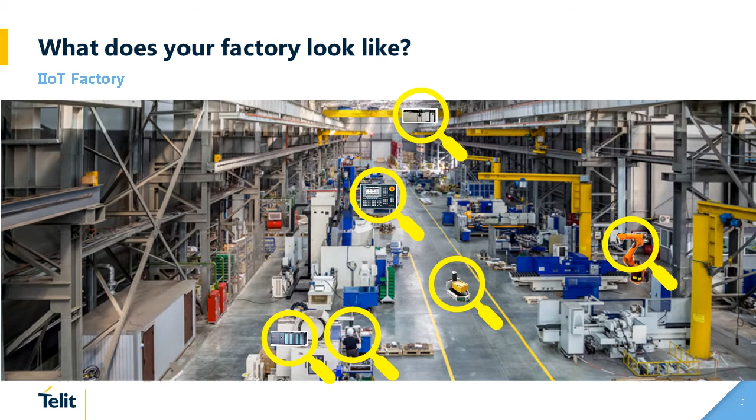What makes this factory an IoT factory are not the controllers that they have, maybe in that smart crane over there, or in this machine over here. Maybe that CNC from Siemens over there, the AGVs moving parts around, the robot on the right-hand side, or even sensors to control the productivity of the people. It also doesn't transform this factory into an IoT factory having SAP ERP systems or Oracle databases or visualizations and SCADA systems, as well as AI platforms in the cloud.

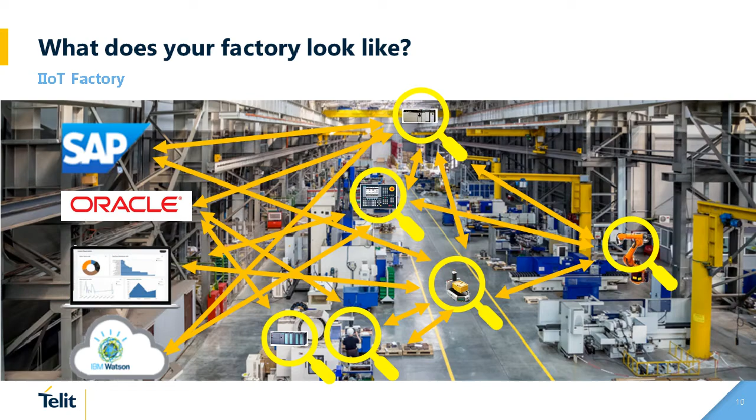What makes this a complete IoT factory is the ability of interconnecting all the different devices, all the different machines with all the IT systems with an intelligent layer of connection. And basically, this is what we do here in Telit. This is what DeviceWise does. Telit won several awards in the market, and it's recognized as a leader in smart manufacturing platforms.

I like a lot the way that ABI Research described DeviceWise, saying that compared to Kepware, DeviceWise has more advantage in lower latencies. Compared to Foghorn Systems, DeviceWise has more advanced IIoT integration capabilities. Compared to homegrown data extraction and edge intelligence solutions provided by industrial automation companies, DeviceWise has more flexibility and more advanced software. But what is DeviceWise at the end of the day?

DeviceWise is a software that can be installed in any type of operating system. You can install it in a Linux computer, in a Windows computer, even in Raspberry Pis or cellular gateways. When you install it, for you to collect data from any machine is simpler than installing a printer at your computer. You just click in devices, you select one of the many drivers that you have.

So here, a few drivers that I downloaded to my computer, you can see Atlas Copco for torque tools, all the different FANUC CNCs and robots, all the different PLCs from Mitsubishi, open protocols such as Modbus, OPC UA, OPC-DA, all the Omron controllers, all the Siemens, all the Rockwells, among many other types of tools that you can connect. We have hundreds of drivers available for you to read and write. You just appoint what is the IP address, and then all the tag tree of the devices gets auto-enumerated on DeviceWise for you to read and write without writing a single line of code.

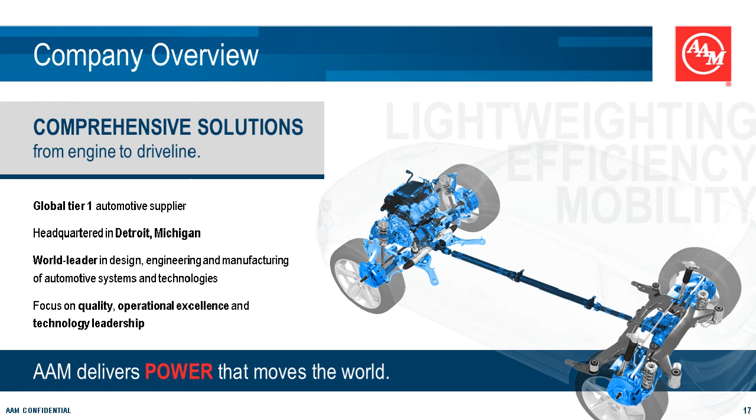Today, we are now spanning 17 countries, I believe, with 80 locations. So the growth has been huge over the past 20 years. We now have over 21,000 associates. At its inception, American Axle's primary customer was General Motors, but today, while General Motors remains one of our good customers, we have over 700 additional customers that we support with our products.

Internally, we're divided up into 2 major divisions. The first is our driveline division, where we make axles, driveline components, prop shafts, independent rear drive assemblies that go in passengers and crossovers. Our axles typically go into light trucks and SUVs. A lot of the vehicles that you see on the road today, those are our axles running in those.

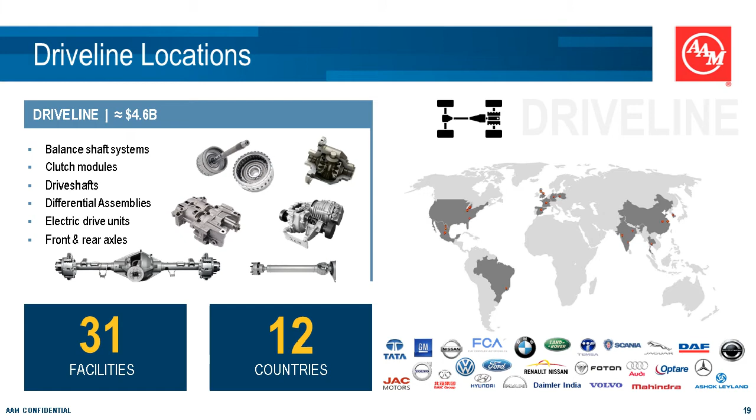We also have a significant push. If you follow the automotive industry at all recently, you'll know that there's a big push into electrification, both hybrid and full electric vehicles. And that's been our push as well. So a lot of our products are moving in that direction. There's just a lot of activity going on. We have a number of major programs where we're supplying either hybrid componentry or full electric drive vehicles. Currently, the driveline division is spanning 31 facilities in 12 different countries across the globe.

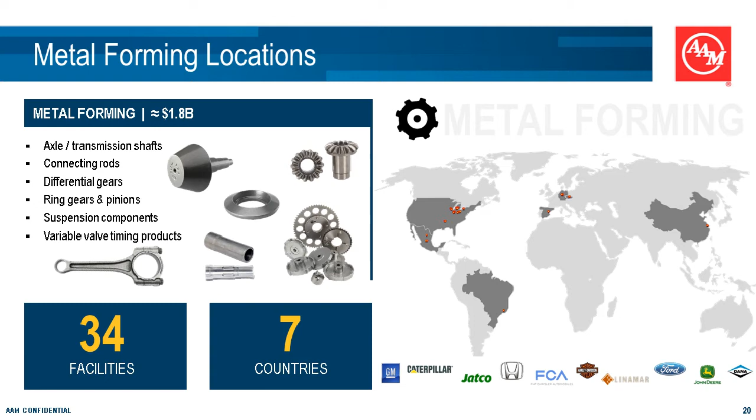Our other division is our metal forming division. Classically, our forging operations fall into that, but it also encompasses a lot of component machining, and that's also spanning 34 facilities in 7 countries. We also have a number of facilities that are either corporate offices, engineering facilities in different regions, and sales offices as well. Myself, I'm headquartered out of our Advanced Technology and Development Center located in Detroit, Michigan. We are right across the street from our world headquarters building on Dauch Drive.

The role I'm currently in is the Manager of Advanced Controls Engineering in that facility. We are responsible for our controls architecture across the globe as we go into new facilities or look at our existing facilities as we deploy new lines. All the controls architecture that we put in place to do our assembly systems and other systems falls under my group to specify and to look at new technologies going forward.

I joined American Axle in 2000, which has now been over 20 years. Prior to that, I was working on a contract basis on several projects at American Axle. And ever since my involvement with American Axle, there's been a huge focus on production build data, machine performance data, getting all that data acquired into a system where it can be visualized, interpreted, and used to make intelligent decisions. If you don't have the data, it's always just an opinion.

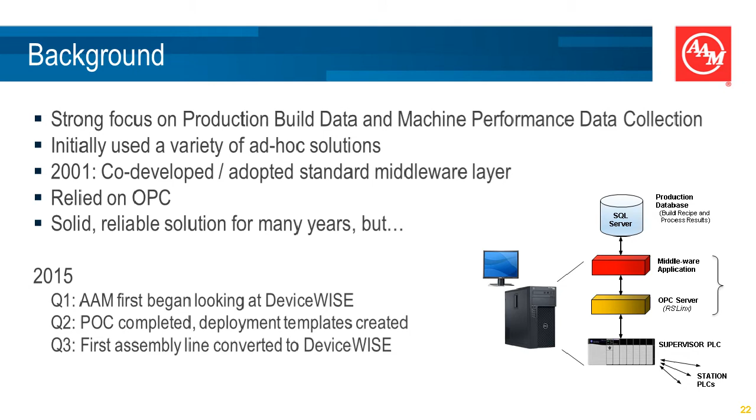When we turned that into a functional system, we did our benchmarking on that, and basically our proof of concept offline, and decided very quickly to move that into a production system to prove its worth to us and decide where we were going to go with it. Some of the features that jumped out to us, and Ricardo touched on a couple of these things, and I'll talk about the ones that were important to us.

Biggest one for us, performance. Our previous application that we used at the middleware layer, because of the generation in which it was written and because it was an OPC-based kind of thing, wound up being a single-threaded application, which normally worked pretty well, but as our demands grew, that became a problem. And DeviceWise, being a multi-threaded application, has a couple of unique benefits, primarily being performance.

The other one is, Ricardo was showing you how to build a simple trigger. Those triggers can all be edited independently. They can be edited online while the production system is running. That became a huge benefit to us. Having that little logic engine in there where we could make decisions down at the edge was a powerful tool for us. We had previously been strictly data collection.

We would identify tags and just simply pull them and suck them up, which was not uncommon. That's what most systems would do at the data collection layer. But being able to make that decision process out at the edge and have handshakes involved where we could be sure that we had that data was important to us.

The Workbench that Ricardo was showing earlier, that is well suited toward remote access. In fact, we always today use it in a remote scenario where the data collection node is down at the assembly line. We always run our configurations from a laptop or a workstation remote from the line, so we don't have to be on that physical PC. That's great from a security posture as well for us.

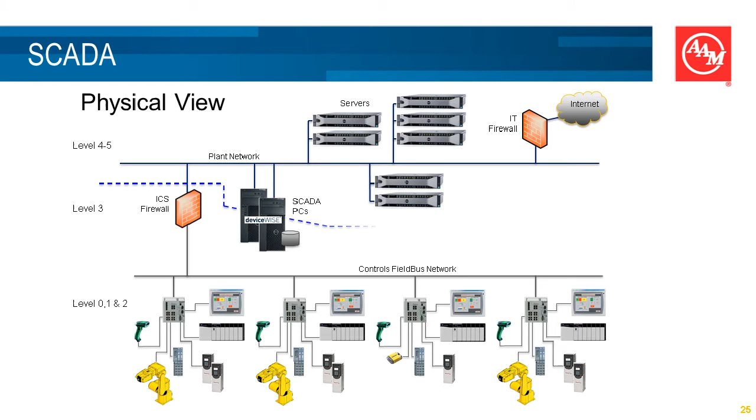Upper level IT systems come down and read that data out of the local database and move it off for other systems for reporting and decision-making solutions that are managed by the IT department. But as far as the data collection side goes, that's kind of where we position it. So we launch one of those systems with every assembly line that we do.

What we did is we took that proof of concept, those initial developments that we did, we put that into a set of templates. We published that in a book and we gave that out to our plants. Now, what Ricardo showed you earlier with how simple it is to put a trigger together was exactly right. It is that simple, but it can be simpler.

One of the things that we found that was a very powerful feature for us is the fact that all of the configuration you can export into an XML format, modify, and import it back in. And that's one of the primary ways that we deploy these systems.

We have a set of templates that we use to deploy to every station on the line, where we take a text XML file, modify it to what we need, import it, and then just go through station by station with those modifications. And in the span of half an hour, I can have the entire line functional with this system.

We go in after we have that first level of functionality, which covers all the handshaking, all the basic transactions, and then we add all the specific stuff for those stations. If we want to collect additional data or we want to retrieve additional limits, we add those in. There's placeholders there for that.

We do all of our interaction with the database with stored procedure calls, and we have in the configuration inside DeviceWise, we build a transport map, is the term that they use for it, where we have all of those parameters identified and templated into our transaction blocks.

So in a typical system, we'll have the project tree that looks something like this. The reason I'm showing you this is we try to keep this as simple as possible, because one of the things I like to do is, in some sense, I like to discourage excessive creativity. While it's a very capable thing, I try to keep my hands on what the standards are and keep people adhering to those standards. That makes things more supportable going forward, which is generally a good strategy.

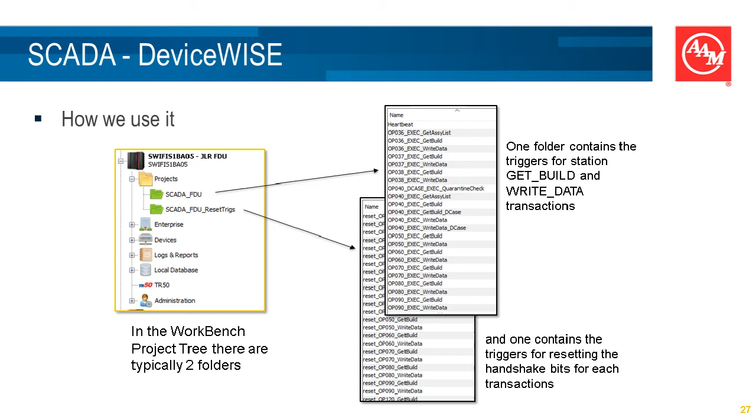But what we find is that DeviceWise is so easy to understand and so easy to work with that where I take this as what we would expect to see, I logged into a system recently in one of our plants and found all kinds of stuff going on. They've taken the system where I would expect to see two elements in the project tree, one for the triggers and one for the resetting of the triggers, and they've added all this other functionality for all these other systems, and they did it in the span of a few weeks.

And so some of these things are being adopted now into standard methodology, and some of these things we've looked at and said, no, these are one-off kind of implementations. But they did this, and it did not really affect performance of the base system underneath. So again, the performance criteria that we used has been significant.

So another area where we use DeviceWise is a device called an ADDAM box. This is the predecessor to a current product called the Smart IO that Telit has. This was kind of the first generation of that. It was developed as a concept, I think, kind of as an ad hoc solution. And this was really about the same time that we were adopting it for our assembly lines, that we were adopting DeviceWise. This is basically an I/O box that we can tie to a CNC machine.

It can bring in a number of data points, specific discrete points. It has both digital and analog capability, but we use only the digital inputs in our implementation. And we're looking for things like whether the machine is on or off, whether it's in auto, whether it's cycling, whether there's a part present, just basic signals to do machine monitoring. And we looked at a number of different solutions on how to get there, and this custom solution at the time was kind of the best choice for us.

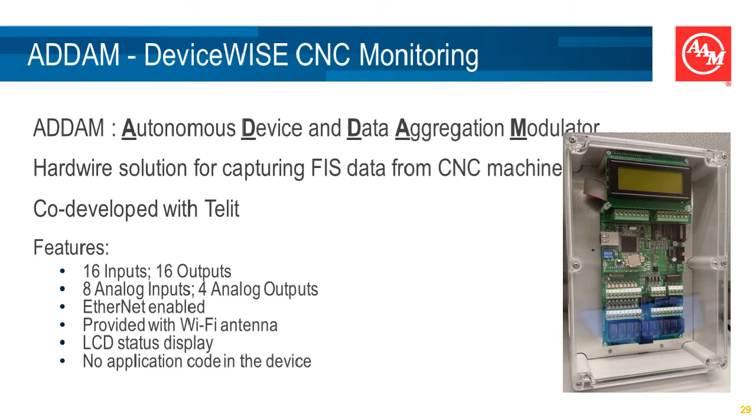So the deployment of this, I mean, it's fairly simple to put in there. It'll mount to a DIN rail, or you can screw it to a backplate. You provide 24 volts, and you provide those signals, and you get those signals sent back to that server. On that server,

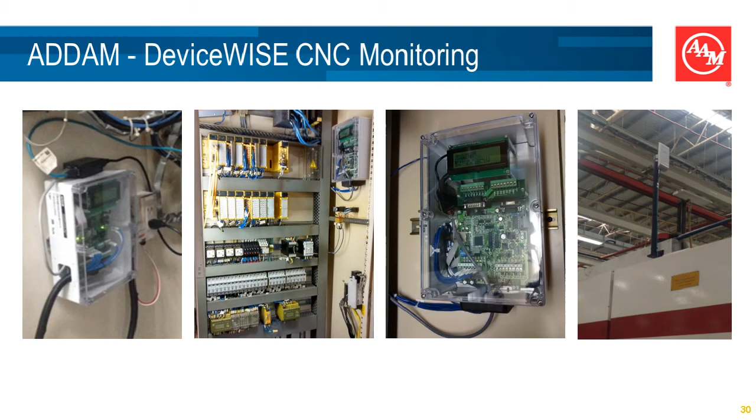we have a listener out there that listens for those Modbus TCP messages, and it turns that into FIS state changes. So it's kind of a very quick way to get a full-blown FIS in terms of monitoring your machine utilization. And I'll key on machine utilization because that's the payback for something like this in the short term. The big money payback on this is keeping a handle on utilization in the plant.

And we found that this was exposing to us places where we had machines that were down that we didn't know, or machines that were running cycles that we didn't expect and not getting the throughput that we expected. So by putting this application together, which was relatively quick to deploy, we began to get a handle on all the CNC machines in a plant, and now you start to get a picture of how much uptime and downtime you're seeing on all those machines, as well as part counts.

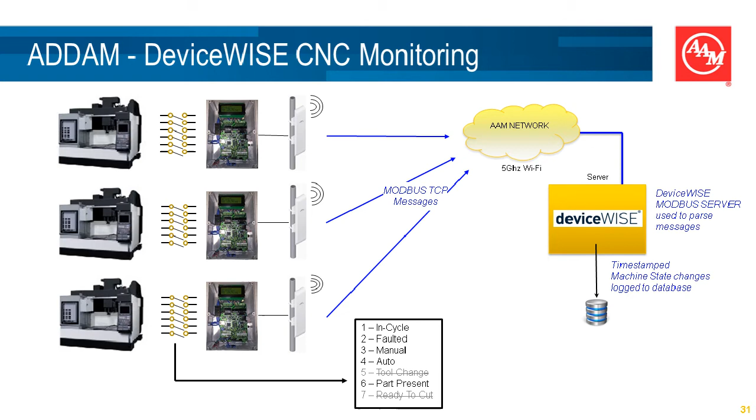So one of the things, for example, that we found is here's a machine that was running with a 67 or 76 second work cycle. Basically, this is time on part. Every so often we would record a work time that was essentially double that.

And what we found was that this was a case where we had an operator that was servicing several machines. So he'd load the machine, hit the buttons, doors would close, he'd walk away to the next machine, and he would be tending a series of machines. So he had a cycle that he circulated in.

And what we found was that even though he hit the buttons and the door closed, he didn't keep his hands on the button long enough to see that the servos were enabled and that motion had started. It was a case where we just didn't have enough feedback for the operator to know that that had happened, and he's trying to get around the cycle as fast as he can. So he's doing his job and doing it well, but just not quite always getting that motion started.

What this led us to was A, identifying the problem, and then B, putting corrective action in place where we could put an alarm on that so that when he started to walk away, we got his attention to come back and hit those buttons and finish. Then this issue went away, and we started to get the throughput that we needed out of that machine. So again, utilization is the big thing. Keeping those machines up and running is critical to us.

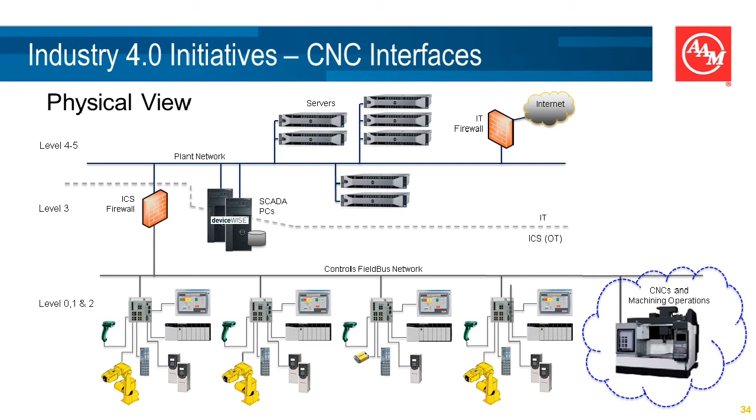They have those capabilities, and if not, they can develop them. They have those skill sets. So we're starting now to push into connecting these machines and now getting not just machine performance information out of them, but we're looking at the extended functionalities that would gain us more value. Optimizing tool life is one of those. That's a good example of that.

Another thing that we have started to do recently, and this was an initiative that was initiated by the plant playing around with our functionality that we had already delivered. They found that a simple Cognex camera on the plant floor had the ability to send an image to an FTP server. They were reading on the DeviceWise screens that there's an FTP server built in.

And so they started to ask some questions, and they contacted us, and they said, could we have an image sent to DeviceWise and then sent up into our system so that we can add it to reports? What they're looking for is error-proofing images. When something fails, they want to know why, they want a picture of it, and they want to archive that.

And so in the span of a couple days, we put together a solution by which we send that, interacted with the PLC to confirm, A, what the serial number was. We integrated a third-party package which allows us to modify the image and embed the serial number in a banner at the bottom of the image so that whenever you look at that image independently, it has the serial number included. We invoke that third-party tool and then forward that image through DeviceWise to a separate repository where it's picked up and then moved into long-term archives.

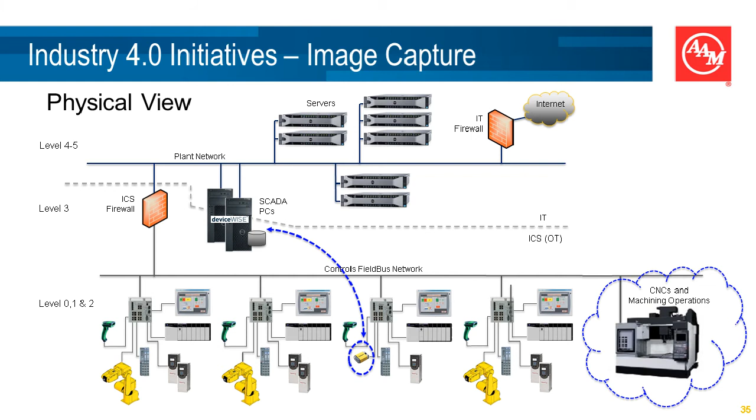Very quick to deploy, but in one of our plants, this has become standard practice. They do this every time they have a camera, and now they're capturing every time they cycle a part, whether it's good or bad. They keep those images for a period of time. It's proved to be very valuable to the plant. Again, not something we planned on, just something that was there, and we utilized it.

Another thing that we have done recently is we've collected data from a PLC. While that sounds pretty boring, what I want to highlight here is due to the way they've written the drivers and the way that we're not doing standard OPC interfaces, we're utilizing the way Telit has written these drivers. What we found is that it is very easy and very efficient to not just pick up what we call scalar data, individual tags or individual data points. We can pick up structures.

So what we can do is we can build a JSON structure that matches a UDT in a PLC. And yes, we're using Rockwell PLCs, so we have UDTs that structure our data for us. I can build a copy of that data into DeviceWise and read it in one read. And what we're utilizing this for is I can take a data structure or a set of coordinate pairs that we use to draw, say, a press curve, and I can read that entire curve in a matter of milliseconds.

When we initially had a requirement that said, can we gather some data points for a curve, I was reluctant to pursue that because I said that's going to add cycle time to your machine, and that's bad. So they dropped the requirement down. They said, well, if we can get 10 points or 12 points or 15 points, that would help us define the curve, at least the point of interest that we're after, and that'll be enough.

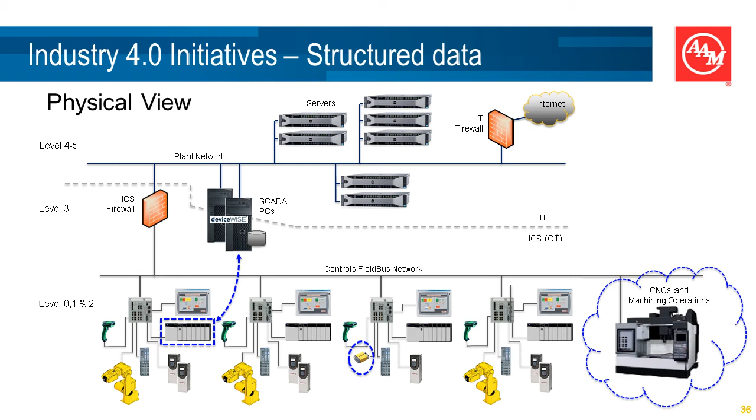One of our recent activities is we're now adding a package called the Cognitive package to move data into AWS. We're taking the same data that we would be collecting. Right now, we're collecting the same data that we had before, and we're simply moving it into AWS. And what we're doing is we're writing it to a Kinesis data stream, or we can write it to an S3 bucket. It doesn't matter, or you can do both. In fact, we are doing both currently.

This is allowing for different analytic solutions. Instead of having to go through mining the repositories that the data lives in, whether it's the local database on the SCADA PCs or the IT server that stores that data, they would have to write a Python script to go and read all that data, and on an interval they would upload it into the analytics engine. Well, right now, by the time that part leaves the station, it's up in the analytics engine already, which gives us much more time to respond as far as predictive maintenance goes.

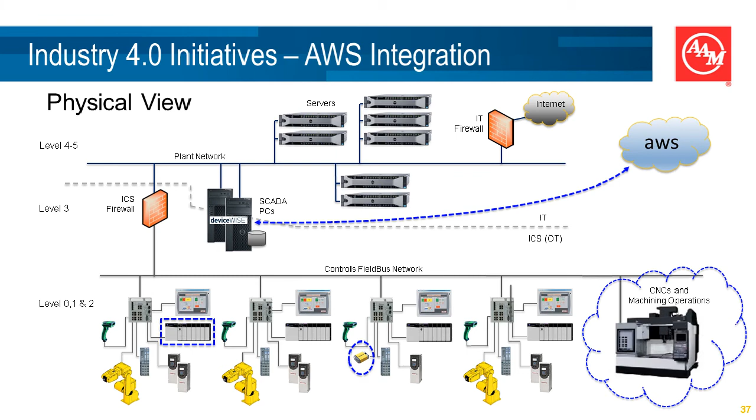One last thing I wanted to mention is we have some cases where we've implemented a product called BEET. And I'm not here to sell you BEET. That's not my purpose. But when we first looked at BEET as a product, what it is

it is something that helps us look at the motions, the actions that happen in individual machines, benchmark them so we know when things are supposed to happen, and establish kind of a baseline of machine operation. Then it monitors that over time and reports on deviation, saying, you know, this slide is taking longer, this motion is taking longer, and raises alarms on what that is. That is expanded, and there's additional functionality as far as optimizing your assembly. And I'm not trying to oversimplify what BEET does, but basically that's the functionality there.

When we first looked at BEET, they were using traditional, actually OPC-based data collection in a polling scenario. And they required a huge driver to be loaded into the PLC, so there's a big code footprint that went with that. And we looked at how that would scale up over time, and we began to have some serious concerns. So we met with BEET and said, hey, we've had some good experience with this product called DeviceWise, and introduced them to DeviceWise and said, there's other solutions that we can do.

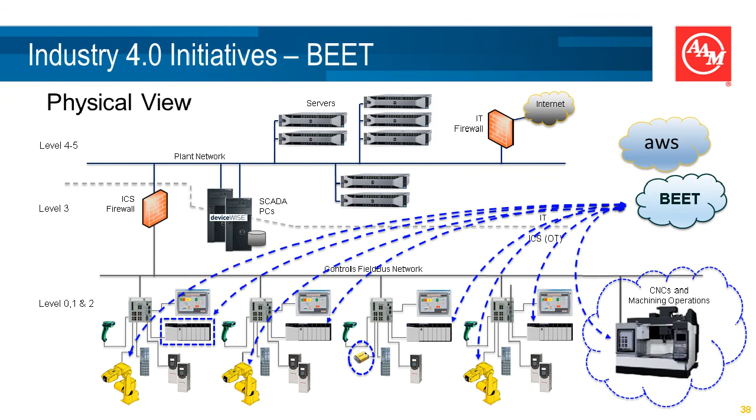So that kind of concludes the things I came to talk to you about today, and I'll turn it back to Amanda and kind of open things up for questions.